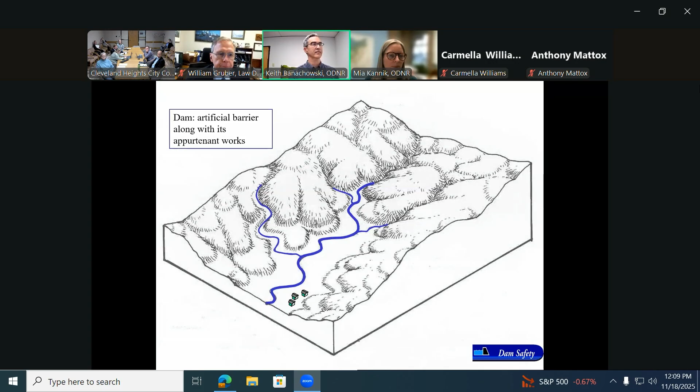To start, to give an overview on dams: here we have a natural valley setting with some streams in the bottom of the valley. A dam is an artificial barrier along with its appurtenant works. For dams in Ohio, we typically have earthen embankments, and appurtenant works are structures that help the dam function. Here we have highlighted a concrete spillway for the dam. The main job of the earthen embankment is to keep the lake in place, both in normal conditions and during flood events, and the spillway is used to move water from the lake downstream.

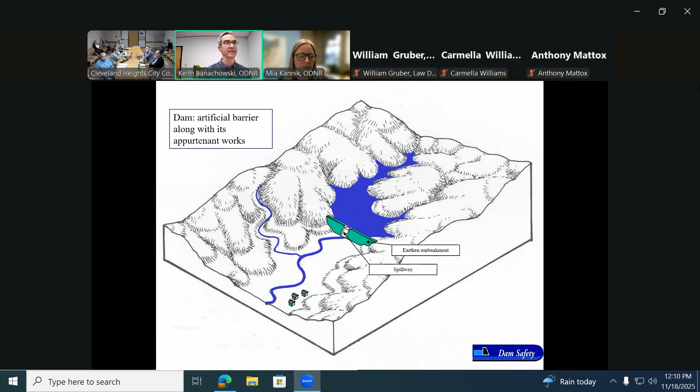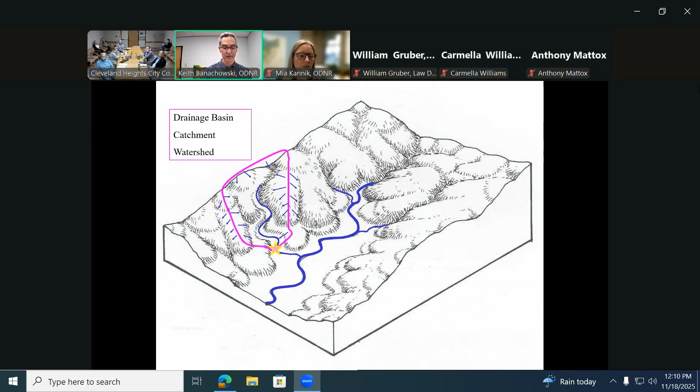Another term you come across is a drainage basin, or a catchment, or watershed. If you look at a point on a stream, there's an area upstream where all the water that runs off inside that area will funnel down to the stream and to that point. During a storm event, some rain goes into the ground, other runs off, and anything inside this line will all flow down to a certain point. A dam is similar in that it has a drainage basin, an area where the water within that area goes down to the lake and then is either stored behind the dam or passes through the spillway.

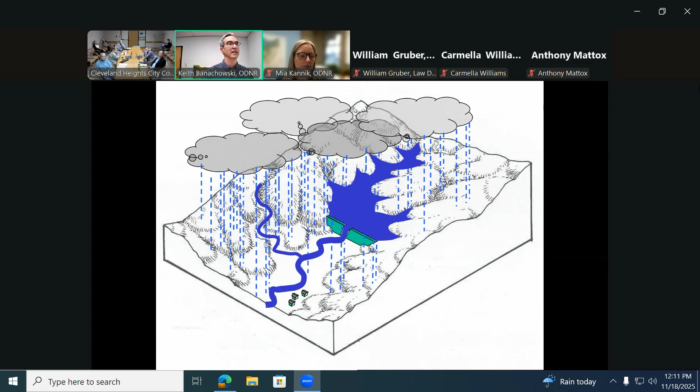So just a quick simulation: during storm events, the lake level is going to go up, the spillways begin to flow, and you get flow in the streams downstream.

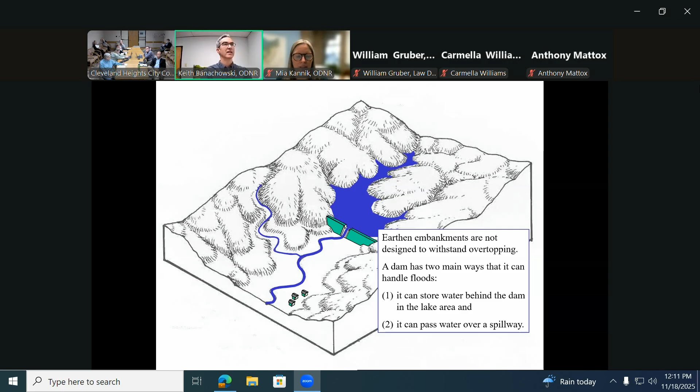A key concept is that earthen embankments are not designed to withstand overtopping. So a dam has two ways to handle floods: one, it can store water behind it in the lake area, and the other way is to have a spillway. Dams work by having both of those. If you don't have the ability to store much water, you need very big spillways. The combination of storing and spillway capacity is what prevents water from going over the top of the embankment. This is a picture of a dam highlighting a couple items.

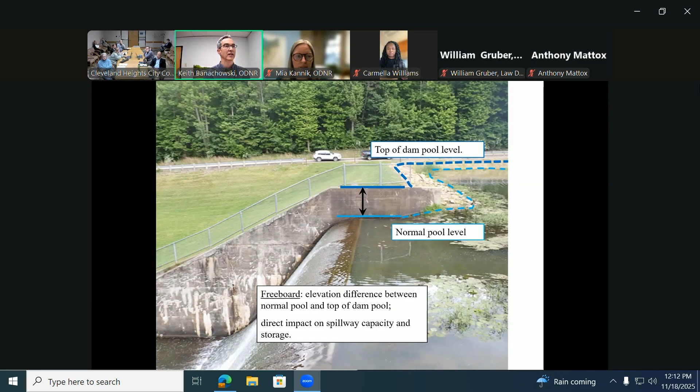The term freeboard is an important one. It's the elevation difference between the normal pool level and the top of dam pool level, and it has a very big impact on both spillway capacity and storage. The more freeboard you have, the more ability you have to store water, and your spillways can convey more water. When you have little freeboard, both are reduced.

All right, so that's the background. Now I'm going to transition over to Lower Shaker specifically. Lower Shaker Lake Dam is located on the east side of Coventry and south of North Park Boulevard. It has a drainage basin of about 4.8 square miles, which is a considerable drainage area for the size of the dam and lake that are there.

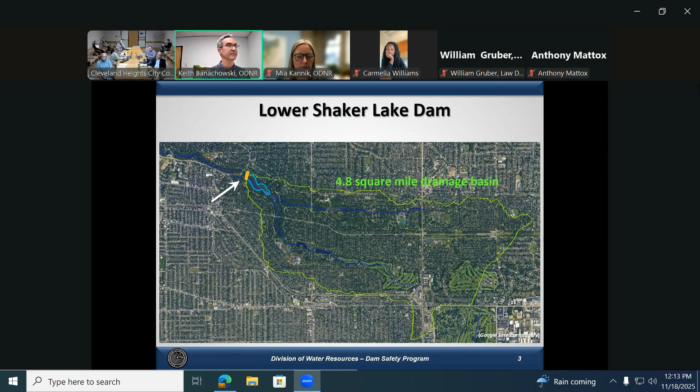For Lower Shaker, again, the definition is an artificial barrier and appurtenant works. The artificial barrier for Lower Shaker is an earthen embankment. It extends from the south side all the way north to North Park Boulevard, and has an irregular configuration. It was built in the 1800s, and it doesn't look like typical dam embankments, but this is all placed fill in the valley that creates the barrier that holds the lake in place.

For appurtenant works, there is a spillway to the south. It's a masonry block spillway with some concrete parts, and that's the main way that water goes from the lake to the downstream channel. There's also a low-level drain, what we call a lake drain, which is relatively small when you consider flood events. The main purpose of a lake drain is to lower the pool for maintenance, to allow you to dewater the reservoir for removing sediment, for other activities such as that.

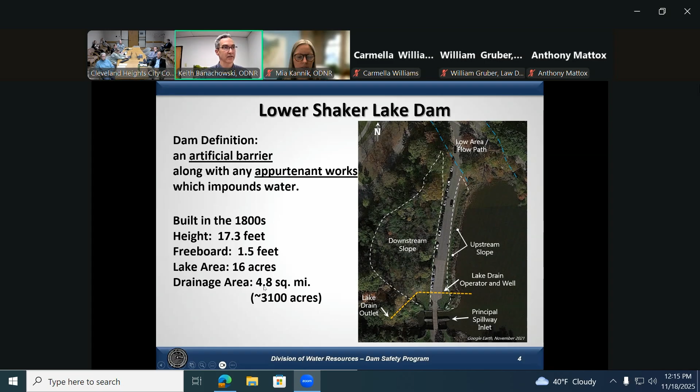Again, it was built in the 1800s. The height of the dam is 17.3 feet. The freeboard is about 1.5 feet. So that's between what the normal lake level and when this right end begins to overtop. It has about a 16-acre lake, and the drainage area is pretty large. It's about 4.8 square miles.

1979 is the beginning of the inspections for the dam. The Phase 1 inspection program was administered by the Army Corps of Engineers. They had local engineers and government agencies inspect dams across the U.S., and it was a comprehensive inspection that included site visits, review of files, engineering calculations.

For the 1979 inspection, the dam was put in Class 1, which is a high hazard classification. The findings of the report indicate that the spillway is seriously inadequate, and they said that the dam was considered unsafe, non-emergency until more detailed studies prove otherwise or corrective measures are completed.

So across the U.S. and in Ohio, these Phase 1 inspections took place. There were a few hundred in Ohio. Some of them would come back and say adequate spillway capacity. We had some emergency conditions, but for this particular one, the two main items are inadequate spillway capacity, and they labeled the dam as unsafe.

The dam safety program is within the Division of Water Resources within ODNR. ODNR has many divisions that operate somewhat separately from each other. We're in the Division of Water Resources, and we're a small regulatory program. One of our responsibilities is to inspect dams on a periodic basis, about every 5 years.

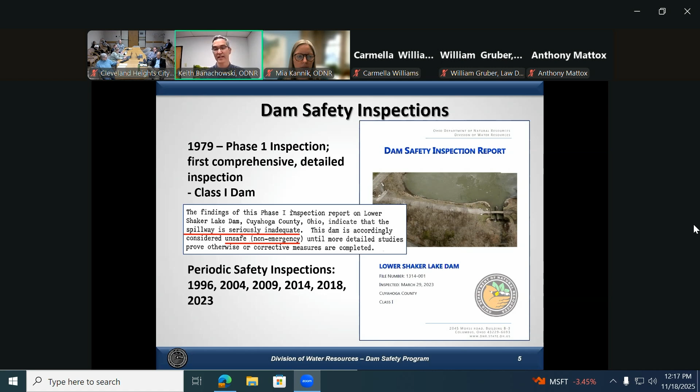In our reports, we break things down into different areas. One is the engineer repairs and investigations. These are the most substantial problems with the dam. We also have owner maintenance items, which are smaller items that the owner can handle on their own. And then we have monitoring items. The items listed in this section, it's a requirement that the owner hire a professional engineer to investigate and address.

So the four items that we have in the 2023 report are summarized there on the left. The first one is still inadequate flood capacity. Flood capacity and spillway capacity are relatively interchangeable terms. So inadequate flood capacity, deficiencies with the masonry spillway, improper crest alignment, and the last one is repairs needed to the embankment.

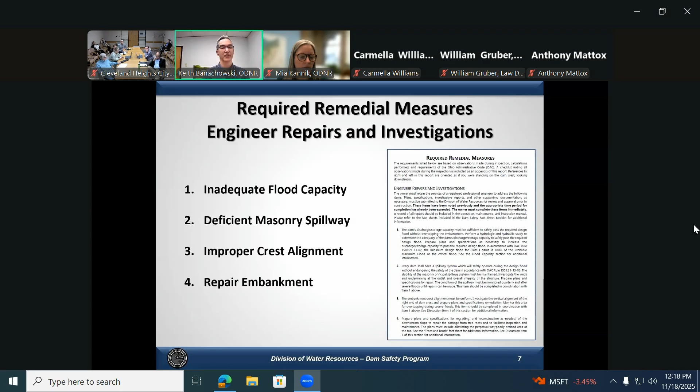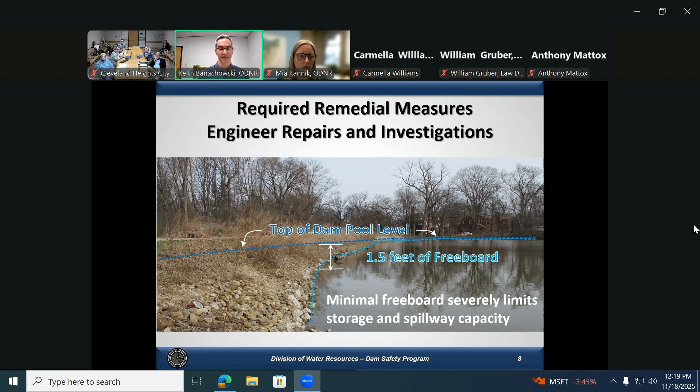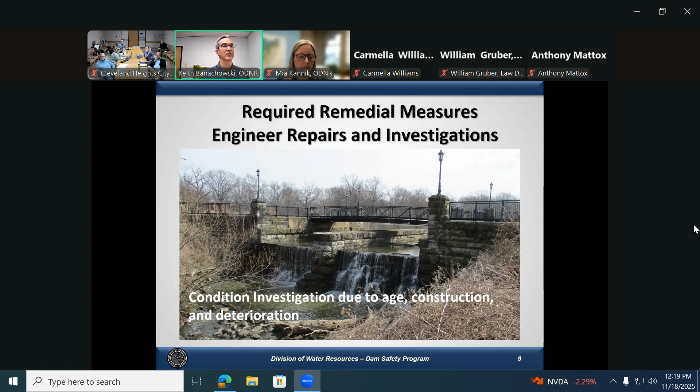This is the spillway at the south end of the dam. It's a relatively old structure that has gone through some modifications, but due to its age, construction, and some noted deterioration, there's a requirement for investigation into the stability and integrity of this structure.

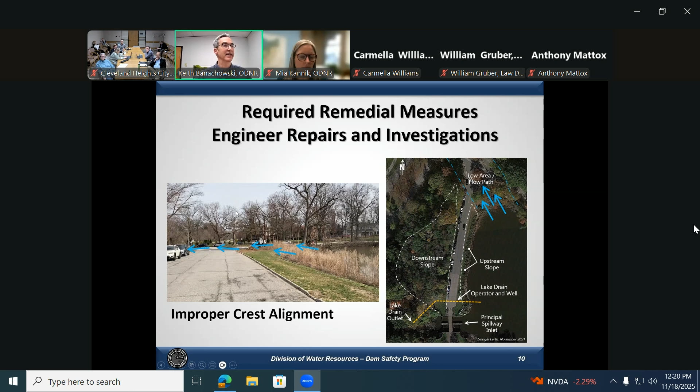For the improper crest alignment, the picture here to the left is toward the right end of the dam, where the elevation of the embankment drops off. During flood events, water will overtop here. There's a small island in the parking lot with a tree. This is not a formal spillway, but water overtops this area, can flow down the road, and can also wrap back around on top of the dam. That is problematic from a dam safety perspective.

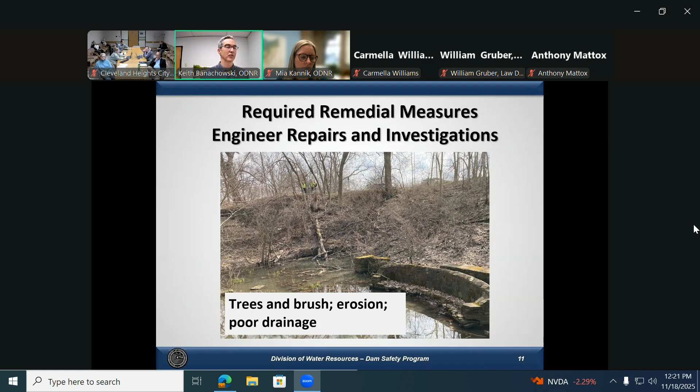The embankment itself has problems with trees and brush, erosion, and poor drainage at the toe. This is standing at the downstream toe, where there's often ponded water and erosion on the slope. For a proper engineered embankment, trees and brush are not a proper cover — the roots cause problems for seepage, stability, and inspection. Given the age of this dam, there would need to be significant repair of this embankment.

The inadequate spillway capacity is a difficult item to understand from that theoretical standpoint, so we thought it would be good to show you a case history of a dam that was also inadequate in its spillway capacity. We'll look at Kinsman Lake Dam.

It's located east of Cleveland near the Pennsylvania border. The dam is on the south side of the impoundment. It's about a 9-acre lake, and you can see it's in a small neighborhood community.

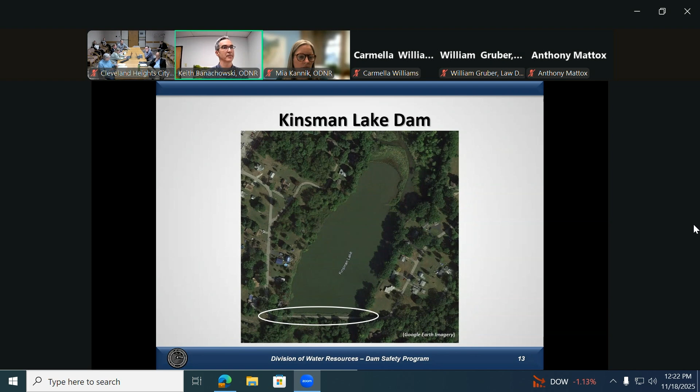It was constructed before 1961. It's a Class 2 structure — Class 1 is our highest level, and Class 2 is the next one down, considered a significant hazard. It's about 23 feet high. For the freeboard, there's 6.8 feet between the pool level and the top of the embankment.

Off in the distance, you can see a person on the embankment. So there's about 7 feet of freeboard on the dam, and it impounds a 9-acre lake.

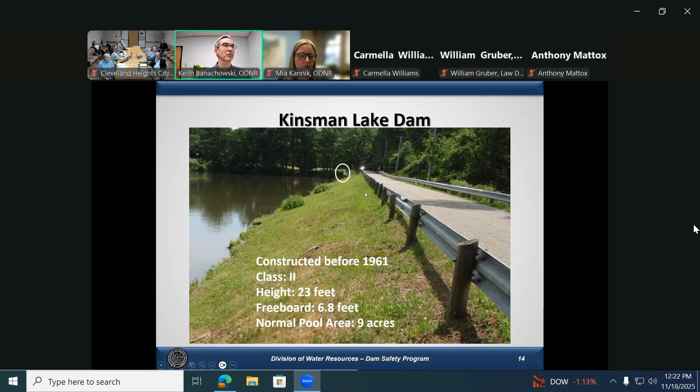In this case, we're standing on the embankment — this is the earthen barrier. The spillway is at the left end of the dam, and we'll turn around and take a look at the right abutment. The upstream slope is relatively clear, there's a road on top, and you can see a guardrail.

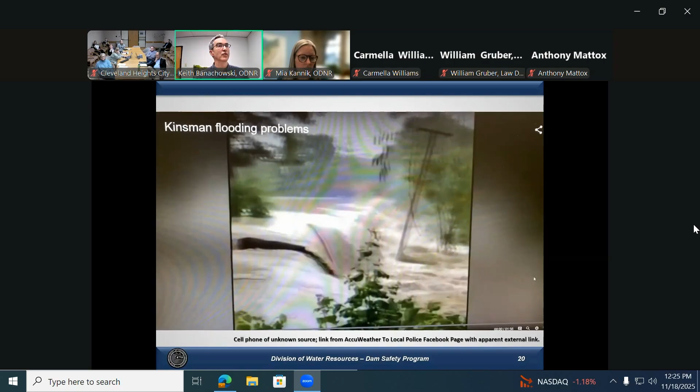This is water going over the top of the dam, about 2 feet deep. The water level rose about 9 feet.

I'll play that again. You can see already there's massive erosion on the downstream slope, more erosion here toward where the film is being taken. The guardrail is overwhelmed in the reservoir, and that large spillway has exceeded its capacity and is going over the bridge as well.

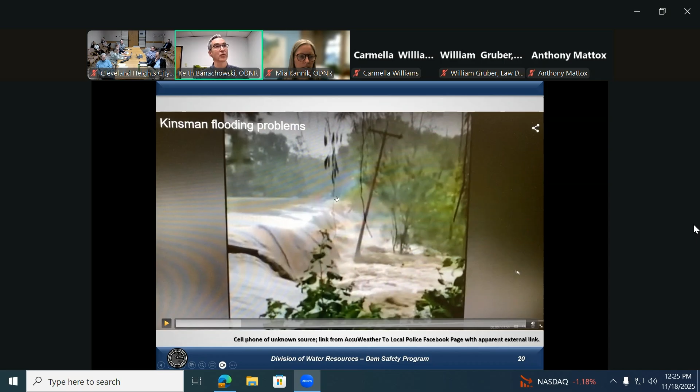As they pan to the left, you'll see some of the mature trees on the dam. This is 2 days after, when we visited the dam.

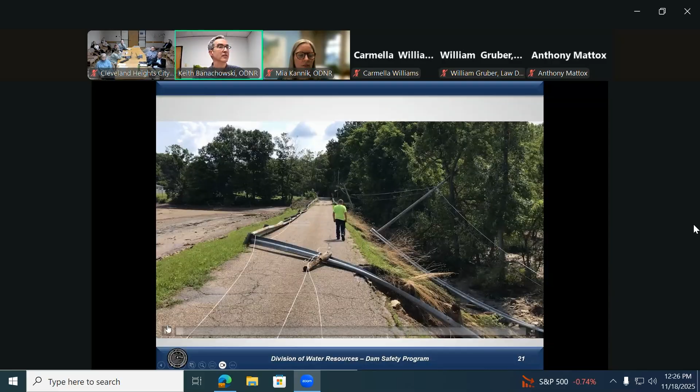So again, the floodwaters were a couple feet over the top of the dam, which is this road, over the top of the guardrail, with severe damage on the downstream slope.

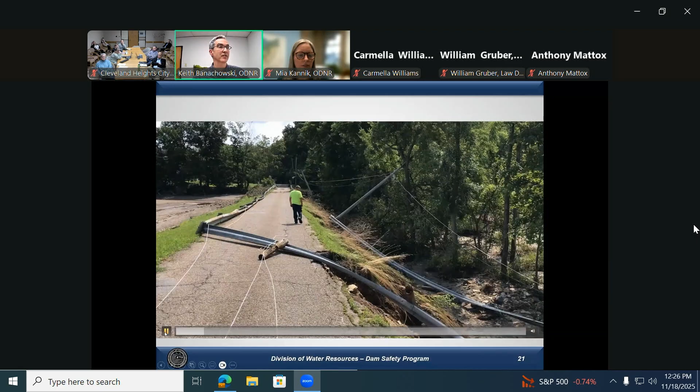Oops, sorry, the thing is a little sensitive here.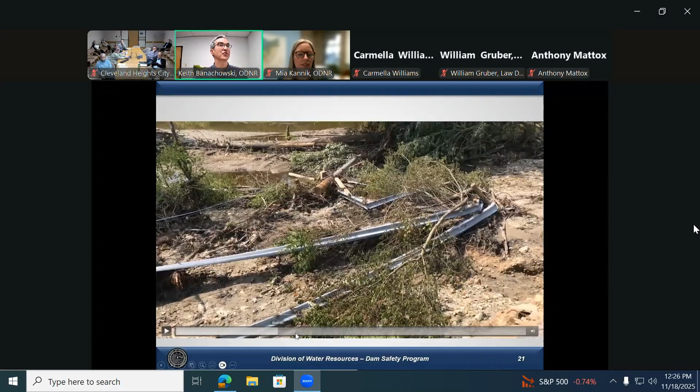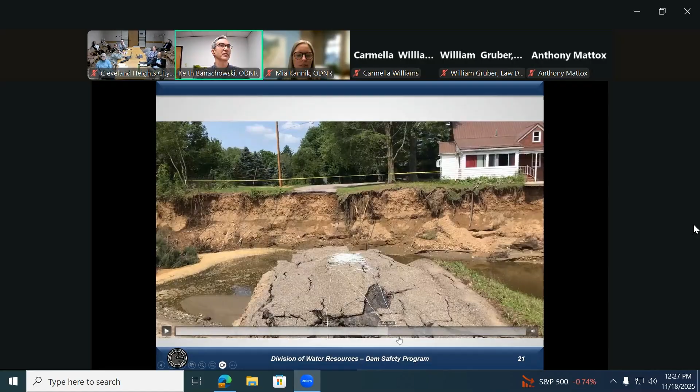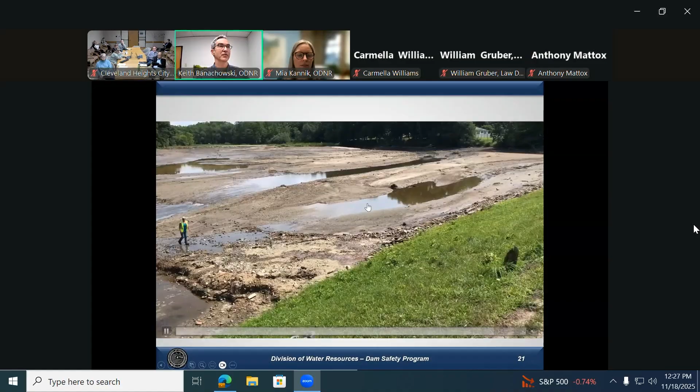I'm going to pan through by hand here. You can see the telephone poles down at the bottom. Those large trees were trees that were on the dam. The breach is over 100 feet wide. The erosion that took place during the breach not only removed the dam, but removed a significant part of the abutment, and this house was condemned afterwards. There was scour of sediment in the natural valley underneath the lake, and it was a complete loss of the impoundment. Here's an overview after the event with the breach on the right side, and this is the spillway that was on the left.

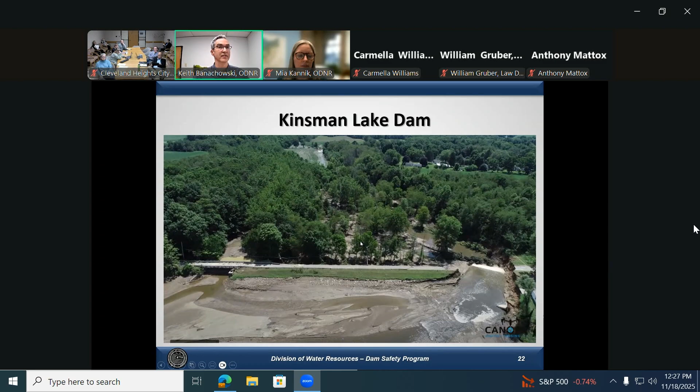So after our 2023 inspection, an engineering group, HDR, did an investigation of the dam. They did a very thorough, comprehensive evaluation of the structure, and it was published in their report. Their findings for the dam are similar to what ODNR found, significant deficiencies with the dam. Again, it agreed with our inspection report, and they did a lot of additional analysis on the dam.

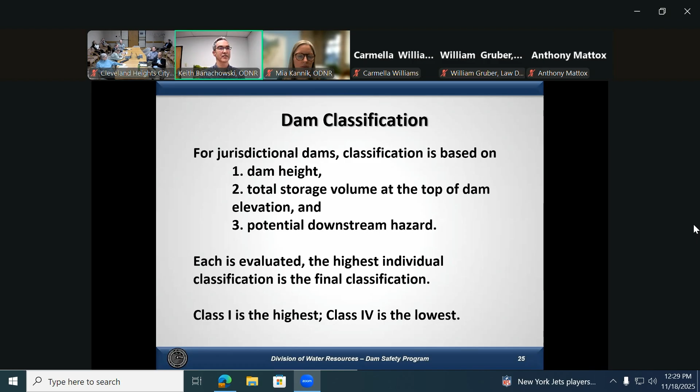Now I'll shift from the condition of the dam and the required remedial measures to the classification. For the Dam Safety Program regulations for our jurisdictional dams, we classify them based on 3 criteria. One is the height of the dam. The second is the total storage volume at the top of dam elevation. And then the last component is the potential downstream hazard. This is considered for all dams regardless of their condition. They have the potential to fail, and we look at where that water would go and what its potential impacts would be downstream. We evaluate each one of these—height, storage, and downstream hazard—and the highest individual classification is the final classification of the dam. Class 1 is our highest, and generally that's called high hazard potential. Class 4 is the lowest. And then we also have 2 and 3.

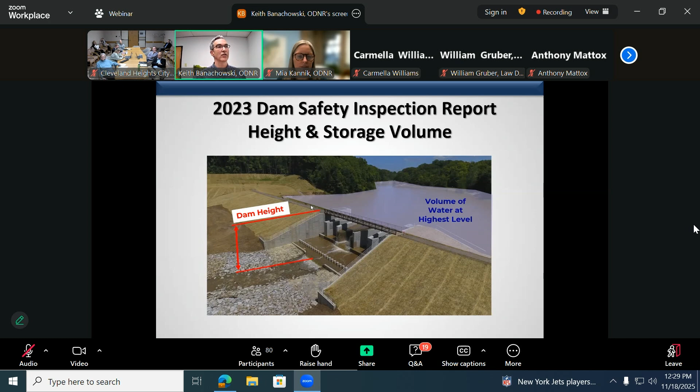So for the height of the dam, it's from the downstream—the lowest point along the downstream toe of the dam—to the top of dam elevation. The water level is considered at the top of the embankment, not the normal pool level down here, but when the water level would increase during a flood event. For Lower Shaker, the height is 17.3 feet. Based on our regulations, that puts it into Class 4, the lowest classification. The storage volume at the top of dam is about 178 acre feet, which is about 58 million gallons. That puts it into a Class 3 designation.

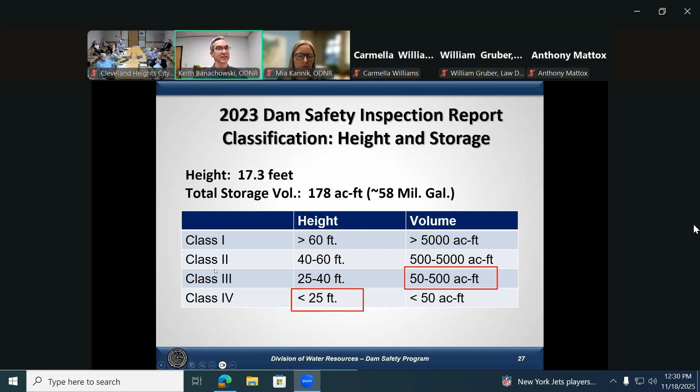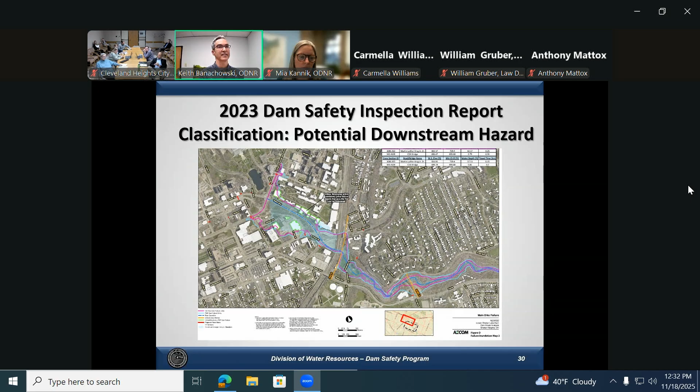So this is one of the inundation maps. For this type of analysis, for this emergency action plan, this was done as what we would consider a Tier 1 analysis. This table is from FEMA, and they discuss different levels of modeling done for dam failures.

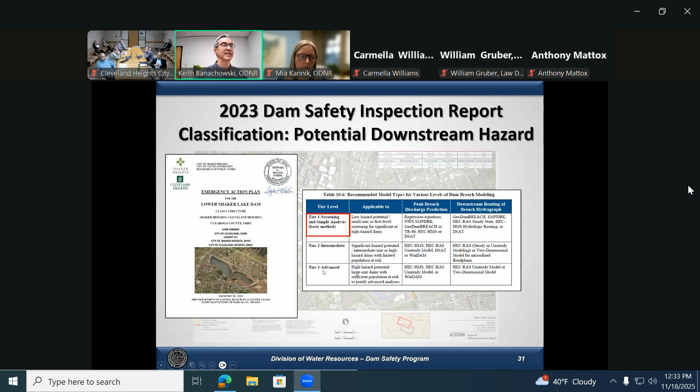So this is table 10.6, it's for dam breach modeling. A Tier 1 analysis is more of a simple screen analysis that provides the overall footprint, the general inundation area, but it's not a detailed analysis for downstream impacts. If you wanted that, you would move to a Tier 3 analysis, which has not been submitted to our office.

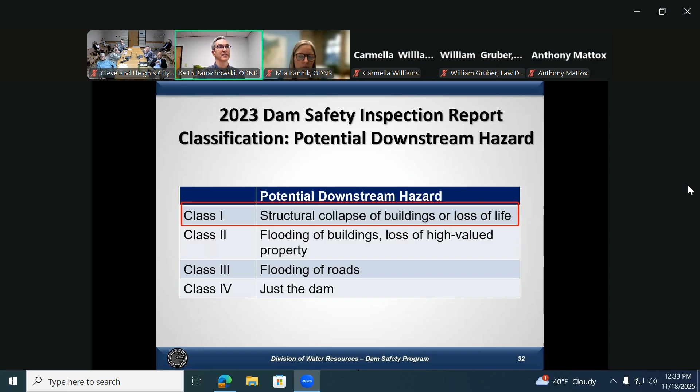So based again on the potential impacts in the University Circle area, the dam is Class 1 based on potential downstream hazard.

So for remediation, there are three main categories that dam owners pursue. First is modification of the dam to meet the dam safety regulations. The second is to modify the dam to be smaller and exempt from the regulations. And then the third is to remove or breach the dam.

Just as a note, I covered this a little bit before. From the dam safety program's perspective, our main focus is preventing uncontrolled releases of lakes behind dams. So as a regulatory agency, we work with the dam owner and their engineer to look at the safety level and improve the safety of the dams.

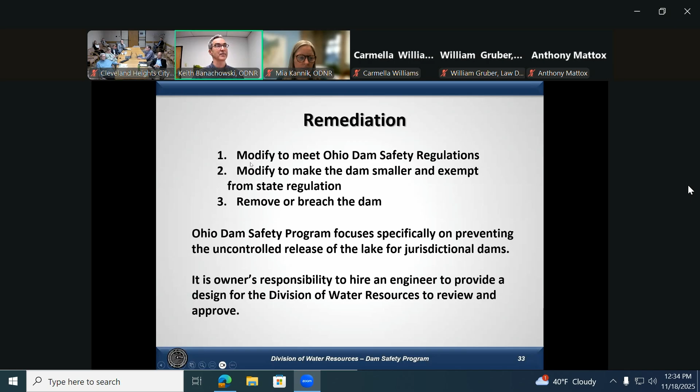The division doesn't decide the fate, but we do require owners to address their deficiencies. And then these are the three paths that they typically take when looking at those deficiencies.

So first of all, to meet the dam safety requirements: the deficiencies with the current dam effectively require construction of a new dam. The fill was placed in the 1800s and has problems in and of itself. The dam is highly inadequate in its flood capacity. So basically there needs to be a new dam constructed in place if it's to meet dam safety regulations. This would mean increases in freeboard, additional spillways, and armoring or replacement of the embankment.

And the HDR report of 2025 does a good job of looking at these issues and different potential configurations for it. One item that's been brought to our attention is the classification of the dam. The owner may provide a detailed dam failure and inundation analysis for a new dam and request a class change. That's an acceptable path.

I do need to point out that what's been provided so far is on the Tier 1 level. If a class change is being requested, we'll need a much more detailed analysis, something on the Tier 3 level. In addition, the dam that is there has so many deficiencies that it's not worth analyzing that dam. We need to see a proposed dam to look at any change in classification.

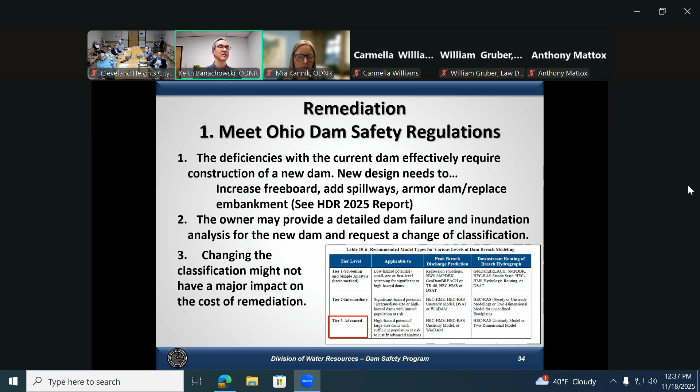And then the last item, changing the classification might not have a major impact on the cost of remediation. The design floods for dams are affected by the classification, but as you saw with Kinsman Lake Dam, that one had more spillway capacity than Lower Shaker, but it was also deficient. If a proposed dam would, let's say, go to Class 2, it may still be very expensive to meet the Class 2 regulations.

So the next general category is to modify the structure to be exempt from our regulations. This is a little different than the classification scheme. The criteria that decide whether a dam is in our jurisdiction is purely the height of the dam and the volume at the top of dam elevation.

So there are three situations where a dam is exempt. The first, regardless of the height of the dam, if it stores less than 15 acre-feet, it's out of our jurisdiction. As an example, a dam that's about 15 feet high with a 2.5 acre lake would be out of our jurisdiction. This covers a lot of farm ponds, smaller impoundments, especially in steeper terrain where you might have a relatively high embankment, but the lake is small. As long as your volume is less than 15 acre-feet, this would be exempt.

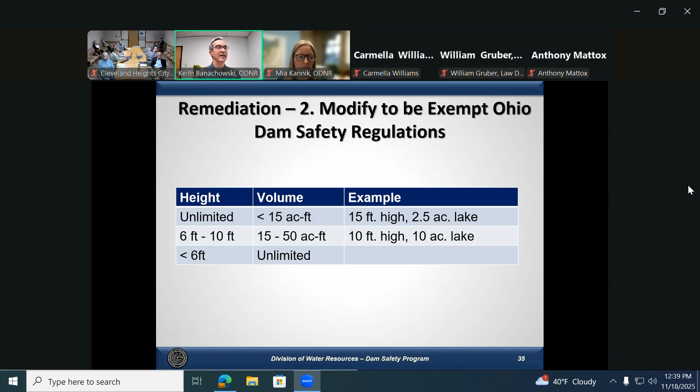In 2003, a major flood event overtopped the dam and damaged it, initiating evacuations downstream within a day. One to two days later, there was another storm that overtopped the dam again. So the dam was temporarily drained and breached, and then the owner modified the structure to make it lower, both for the pool area and the embankment.

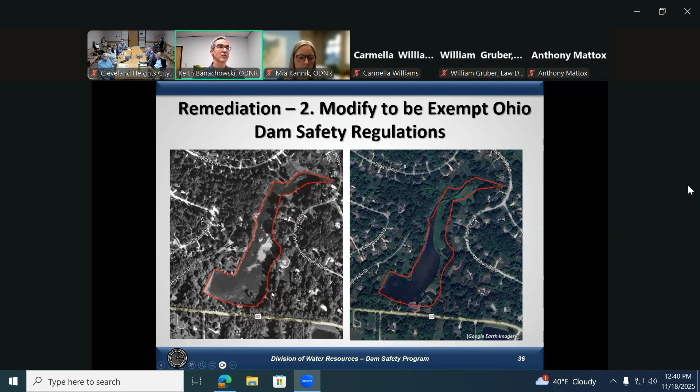And they made it exempt from our regulations. So this is the original impoundment. You can see there is now a smaller impoundment, and along with that, the embankment crest was lowered, so it has less storage potential behind it. The spillways were modified to make the normal pool lower, and then there you have the smaller impoundment.

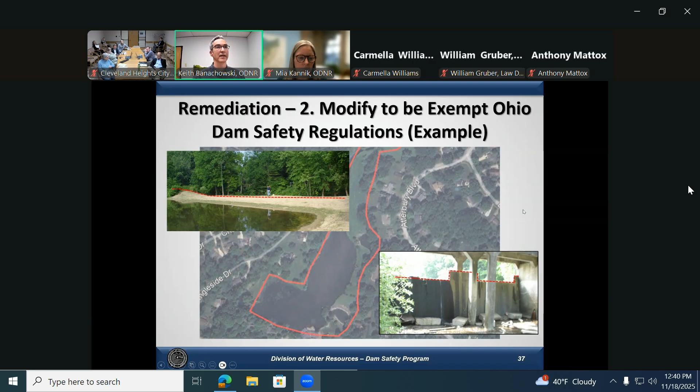Switching to the next category, for removal or breach. For this particular situation, the owners decided that this water supply reservoir was too costly to repair and maintain, so they decided to breach the structure. A breach is an excavated channel through the embankment so that the dam no longer creates an impoundment.

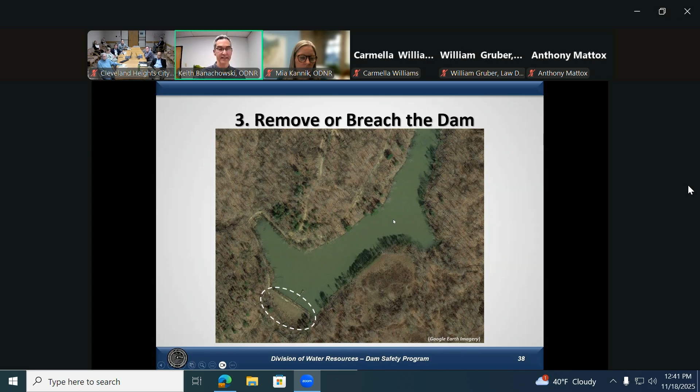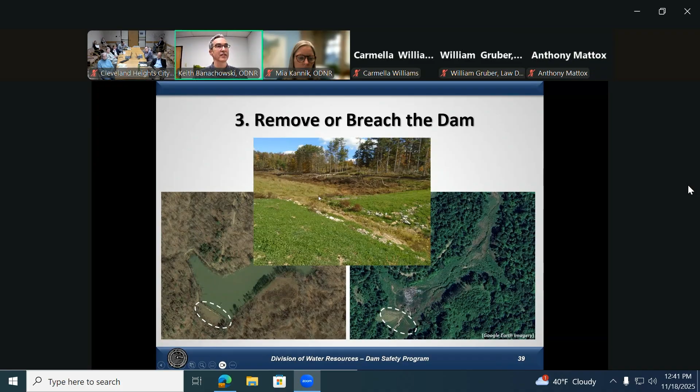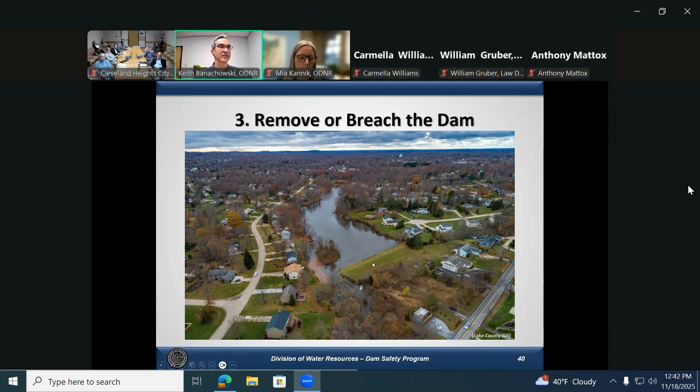They had several homes downstream of it, which made it a high hazard dam. The decision was to remove the dam.

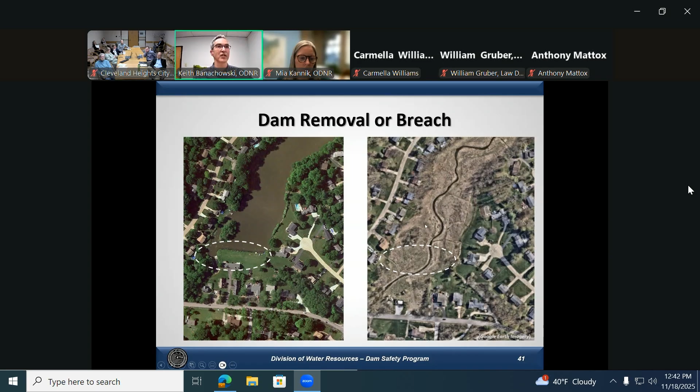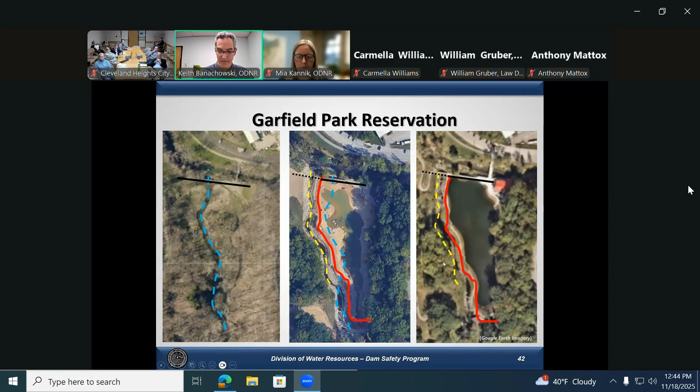So with that, that's the conclusion of the information we have to present, and I can field questions from the council.

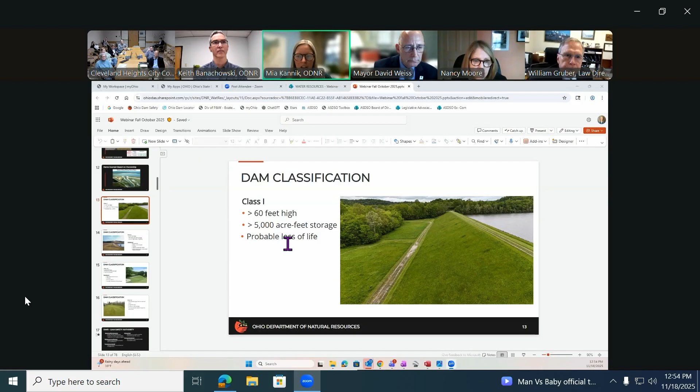So you can see here class 1 dams. This is any dam that's greater than 60 feet, if it has more than 5,000 acre feet of storage—think of an acre foot as an acre with 1 foot of water in it. I know it's kind of strange terminology, but that's typical for storage volume in dam safety. And then there's probable loss of life or structural collapse. These are usually your bigger dams, but it can be a small dam that has a hazard relatively close to the stream channel.

Class 2 dams are any dam that's between 40 and 60 feet high, with 500 to 5,000 acre feet of storage, and loss of high value properties—that's damage to businesses, other dams, homes, interstates, state routes, and water or wastewater impoundments.

Then class 3 dams are much smaller, and the property damage is more like agricultural structures, garages, exempt dams, local township roads that don't have a lot of traffic on them. So I wanted to point those out. As you said, you're looking at the three different things: height, storage volume, and downstream hazard.

You're always needing to evaluate that hazard downstream, because when you have a dam, you're creating a hazard by having that lake behind it. The people downstream may not be aware that there's a dam up there with all this water behind it. So by having that dam, you're creating a hazard to the people downstream. That is why we have dam safety—we want to make sure the dam never fails in any kind of large flood event, or has structural or stability issues.

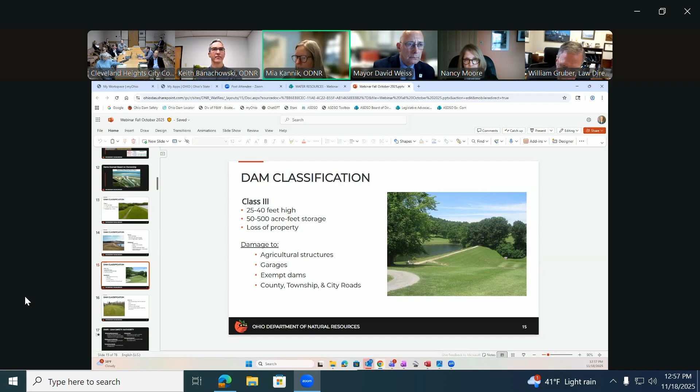So with that, I will turn it over to Keith. I will stop sharing. All right, we'll see if this works. Thank you, Mia, for that addition of information in between. So is everyone able to see my screen? Yep, yes, okay, so I have the impoundment outlined.

So the question I recall is about a side channel feature potential for Shaker. Again, we work with design engineers routinely, and we convey as much information and perspective as we can with them, but we don't tell owners what alternative they have to go with. They evaluate those and propose something to us. And as Mia said, we look at public safety and either approve the alternative or indicate if there's a problem with public safety.

So for the impoundment, hypothetically, if a culvert was installed to drain the lake, you could potentially add an embankment along the edge, either this size or potentially much bigger, to create a side channel impoundment. So you would still have the water feature, and the main channel for Doan Brook would bypass the impoundment.

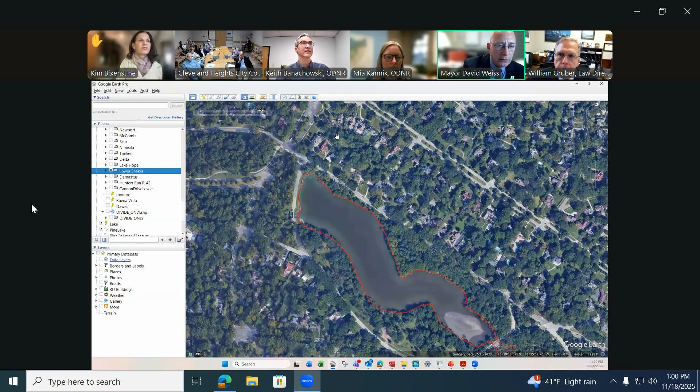Council, Shaker Council. Ms. Bixenstine, I saw your hand first. Thank you. Thank you, Mr. Banachowski, for this excellent and informative presentation.

We had heard from the Northeast Ohio Sewer District in July that if the dam were to be rebuilt to be a Class 1 dam, that it would require fencing around the area near the dam on the west end of the lake that was approximately 8 feet tall. I don't know if you would call that freeboarding or if that's something else. And I'm just wondering if you agree with that. Did that come from ODNR? That was a concern that it would negatively impact the aesthetics of the area.

Sure. So HDR is an experienced dam engineering group, and it's common during their design process that they'll periodically meet with us to give kind of a broad review of what they're looking at and some of their conclusions. So HDR did, we had a call with HDR and they discussed some of the things that they were investigating and wanted our feedback and initial perspective on things that they thought needed to be done.